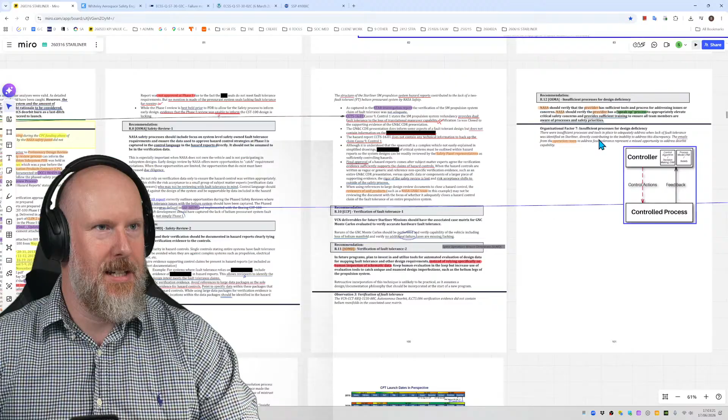But today we're going to continue from where we left off yesterday, and let's just bring that up on screen. There we go. So we got to yesterday the end of section 4.7.1, observations and recommendations, and we're going to continue with section 4.8 today. But before I do that, I'm going to mark off on the table of contents where we've actually got to. So we've done everything up until 4.7. I think that's where we got to, isn't it? Yes, it is. So we're now on section 4.8, common observations and organisational factors.

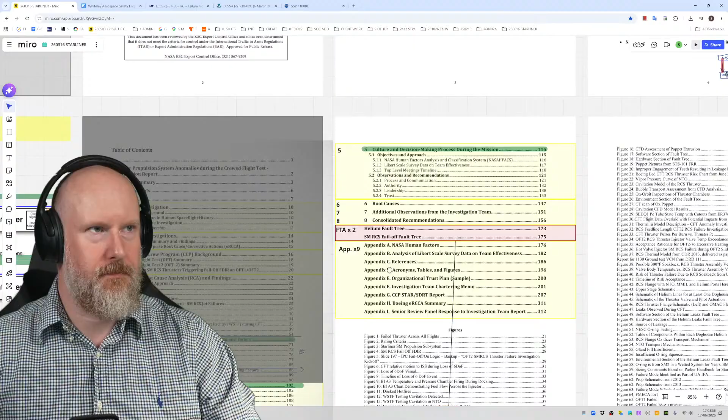That goes on to section 5, which is page 115. So there's about 13 pages there, and we should be able to get through that today, hopefully tonight. So about an hour, 90 minutes.

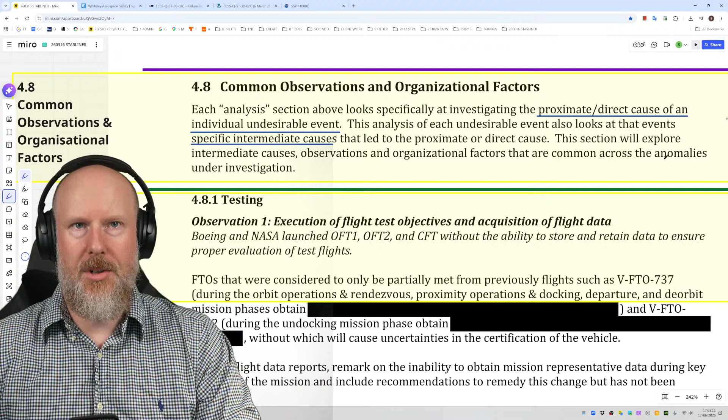So section 4.8 then. Common observations and organisational factors. So each analysis section above looks specifically at investigating the proximate direct cause of an individual undesirable event. This analysis of each undesirable event also looks at the event's specific intermediate causes that led to the proximate or direct cause. This section will explore intermediate causes, observations, and organisational factors that are common across the anomalies under investigation.

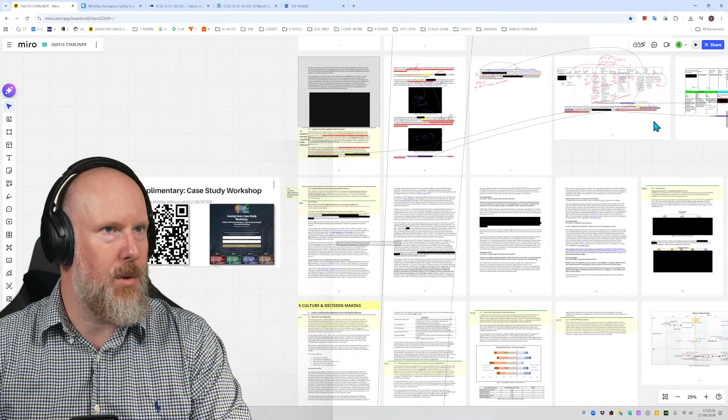Fantastic. So section 4.8.1 is about testing. There are some organisational factors. There are some recommendations. So what I'm going to do is steal my boxes and black lines from over there so I can better break the report up and understand and consume what's in it. So let's just do that quickly. Bring that all to the front. That's not what I wanted. That is what I wanted there, look. Excuse me.

There we go. Organisational factor 8. Recommendation, organisational factor 9, and then there's a recommendation, where is it? Just there, number 13. Nope. Recommendation 14, recommendation 15, recommendation 16. And then we'll keep going later on, depending on how far we go and how fast.

Okay, so testing. Observation number 1, execution of flight test objectives and acquisition of flight data. So if we get our little jigsaw puzzle piece that I keep talking about, it should be embedded in your brain by now, the number of hours I've been doing this and talking about it. So when we're talking about, yeah, there we go. So observation number 1, execution of flight test objectives and acquisition of flight data.

So if we just have a think about that statement through the lens of the control loop, the jigsaw piece, somebody or something is executing, so providing control actions, and they are essentially attempting to execute flight test objectives. So this controller, whoever that is, the flight test organization, they are making decisions about what objectives to put into the program, and then also which objectives to actually execute. And of course, they need some feedback about the flight test itself in the form of some data to ensure proper evaluation of those test flights.

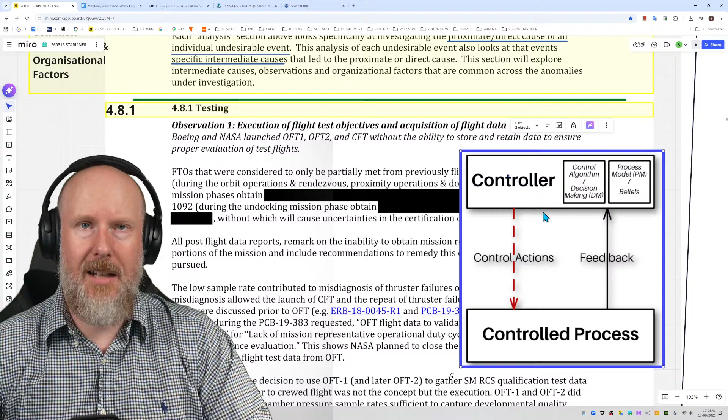So what sensors they have, what recording devices, how much data, at what rate and resolution, all of that good stuff. And that should hopefully provide the flight test organization adequate feedback to be able to assure that they've met flight test objectives. And of course, if they don't meet flight test objectives, what actually is the state of the situation? Because they need qualification data, they need test data, and of course they need to make sure they design that appropriately.

Now, in this case, it mentioned Boeing and NASA launched OFT-1. Is it operational flight test? Orbital flight test, that was it. Orbital flight test number 1, number 2, and the crewed flight test without the ability to store and retain data to ensure proper evaluation of test flights.

Which I'm sure you're already thinking, well, hang on a minute. Why would you spend all that time, treasure, blood, sweat, toil, and tears to do some launches if you're not actually going to store and retain the data to ensure proper evaluation of test flights? That seemed like a bit of a strange statement to make. So let's look into that. Let's understand what is going on. What does that statement actually mean? What's involved?

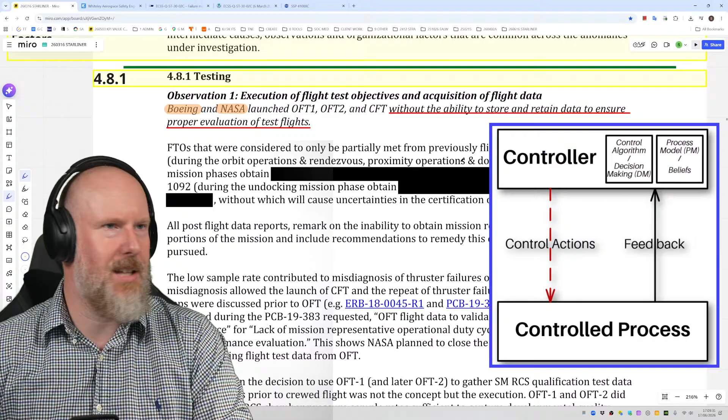Okay, so FTOs. What's an FTO? FTO is not a Japanese car from the early 90s. FTO, flight test objectives, I'm presuming. Yeah, there it is, look. Flight test objectives. Can you see that on the screen? Let me zoom in. There you go. Flight test objectives, FTOs.

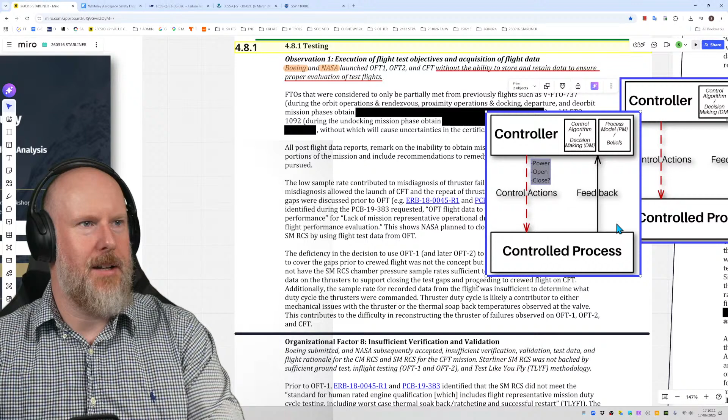So let's use our little grey boxes for text, because that was helpful before. There we go, that one. Let's put it over here, so I don't have to keep trying to remember over and over again. Right, there we go. So I'll delete that, paste it in there. Flight test objectives, stretch it out a bit. There we go, flight test objectives.

Flight test objectives that were considered to only be partially met from previous flights, such as VFTO 737, during the orbit and operations and rendezvous, proximity operations and docking departure and deorbit mission phases, obtain blankety blankety blank, and FTO 1092 during the undocking mission phase, obtain blankety blankety blank, without which will cause uncertainties in the certification of the vehicle.

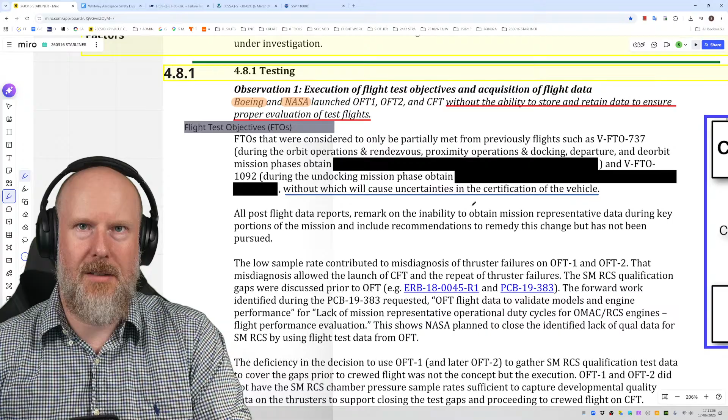So these two flight objectives are clearly really important to the program. That's the main objective here, is to be able to certify the vehicle. So without those two flight test objectives being achieved, then there's no point to the program. It's basically what we're all doing here. All post-flight data reports remark on the inability to obtain mission representative data during key portions of the mission and include recommendations to remedy this change, but has not been pursued.

Surely this would be on the main dashboard, the risk dashboard for the entire program. If you're not doing this, then what the heck is going on? I'm stating the obvious there, so let's keep going. The low sample rate contributed to misdiagnosis of thruster failures on OFT-1 and OFT-2.

So again, if this is the conduct of the flight test and the spacecraft operations, and this is our ground control, our project organization, they need adequate timely feedback about the spacecraft and its performance and behavior, so they could make safety critical decisions in a timely fashion. And if that data is not available to them, then the control structure is very, very inadequate in controlling those hazards and those risks.

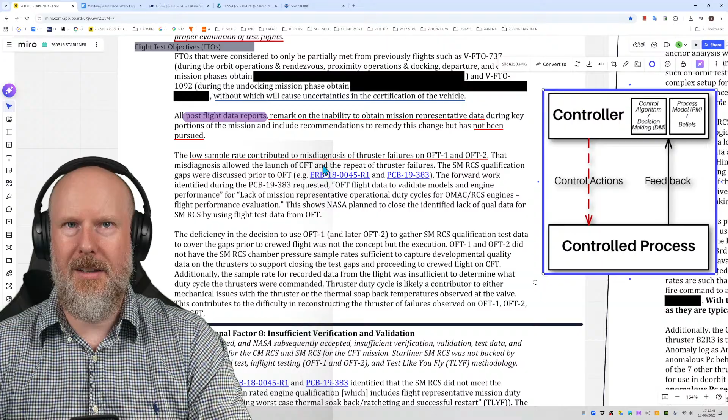So why was that? Why would it make sense to launch without the ability to obtain mission representative data and then not pursue it? And then, of course, why would it make sense to have a low sample rate that contributes to misdiagnosis of the thruster failures? What's going on? That misdiagnosis allowed the launch of CFT. So this is really bad. And the repeat of the thruster failures.

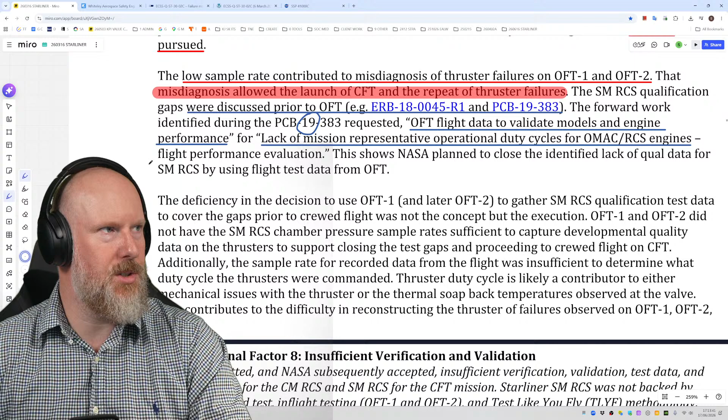The service module reaction control system qualification gaps were discussed prior to OFT. So they were discussed. Fantastic. The forward work identified during the PCB meeting 19383, so is that 2019? Presumably. Requested OFT flight data to validate models and engine performance for lack of mission representative operational duty cycles for OMAC RCS engines, flight performance evaluation. Yeah, that's kind of a basic requirement you'd expect to be fulfilled.

This shows NASA planned to close the identified lack of qual data by using flight data, test data from OFT. Well, yeah, okay, makes sense. The deficiency in the decision to use OFT-1 and later OFT-2 to gather service module reaction control system qualification test data to cover the gaps prior to crewed flight was not the concept, but the execution.

Sorry, the deficiency in the decision to use those to gather qualified test data to cover the gaps prior to crew was not the concept, but the execution. That doesn't make sense to me. I think it's either been a long day or I'm a bit slow today. Does that make sense to you, that sentence? The deficiency in the decision to use OFT-1 and OFT-2 to gather data to cover the gaps prior to crewed flight was not the concept, but the execution.

OFT-1 and OFT-2 did not have the RCS, okay. So those flights were not equipped to be able to do the sample rate sufficient to capture development quality data on the thrusters to support closing the test gaps and proceeding to crewed flight on CFT.

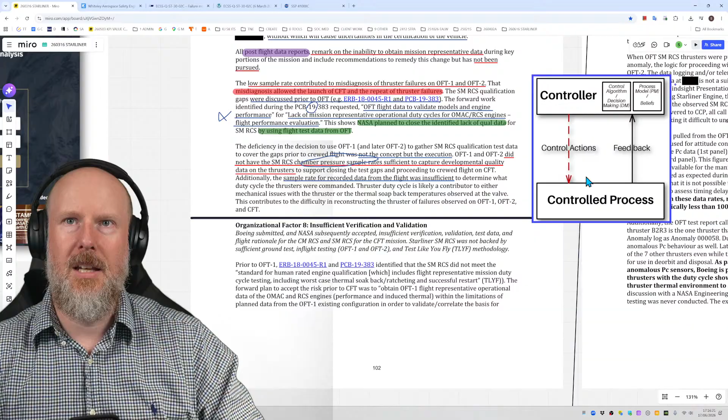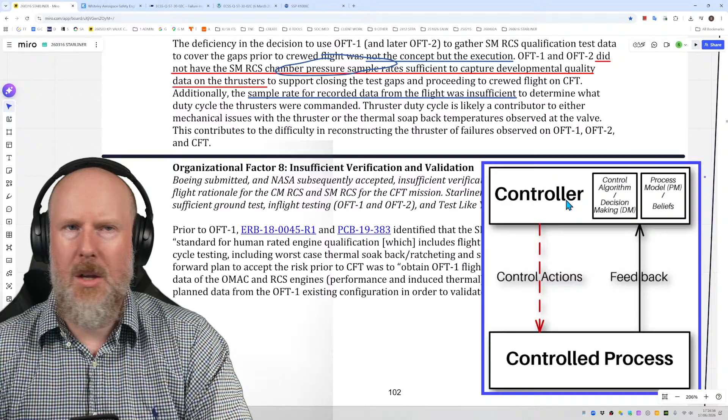So if this is our spacecraft control system, ground control, and this is the provision of the thrust and everything to do with control of thrust, and then this is the behavior of the spacecraft at the bottom, change in trajectory, all of that good stuff. If the feedback path for data is inadequate, not only is it potentially inadequate for the controller itself, but also for everyone else who needs that data. And that's clearly not acceptable in principle. So why was it accepted? Was it accepted knowingly? Let's have a look. Let's find out if we can.

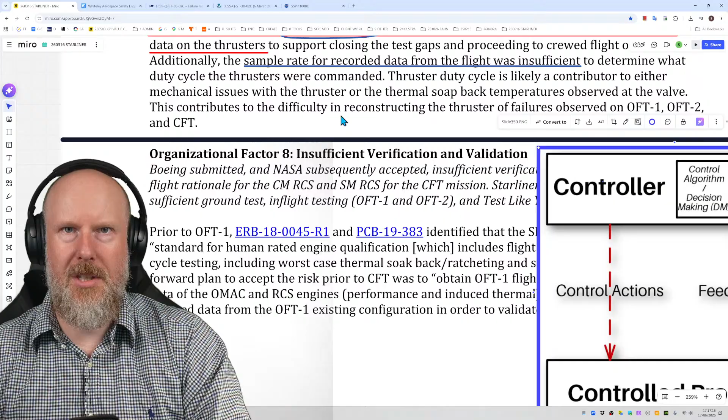Thruster duty cycle is likely a contributor to either mechanical issues with the thruster or the thermal soak-back temperatures observed at the valve. This contributes to the difficulty in reconstructing the thruster failures observed on OFT-1, 2 and crewed flight test. Okay, so that's observation 1, execution of flight test objectives and acquisition of flight data.

So I wasn't expecting that kind of observation. That's quite damning. That is quite damning. I can't imagine at the moment why it would make sense to continue with that. That seems quite strange. But let's keep going.

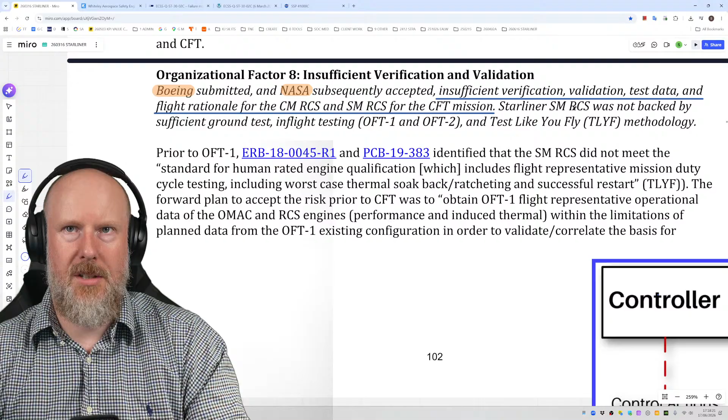Organizational factor number 8. Insufficient verification and validation. Boeing submitted and NASA subsequently accepted insufficient verification, validation test data and flight rationale for the crew module RCS and the service module RCS for the CFT mission. Starliner service module RCS was not backed by sufficient ground testing. Wow. Was not backed by sufficient ground testing, in-flight testing, and test-like-you-fly methodology. Excuse me, I think I'm coming down with something.

Prior to flight test number 1, ERB 18 and PCB 19 identified that the SM RCS did not meet the standard for human-rated engine qualification, which includes flight representative mission duty cycle testing, including worst-case thermal soak-back ratcheting and successful restart. So that is the test-like-you-fly methodology that's mentioned there. Okay, so they knew about it. The attendees and organizations involved in the ERB and the PCB knew that that was the case.

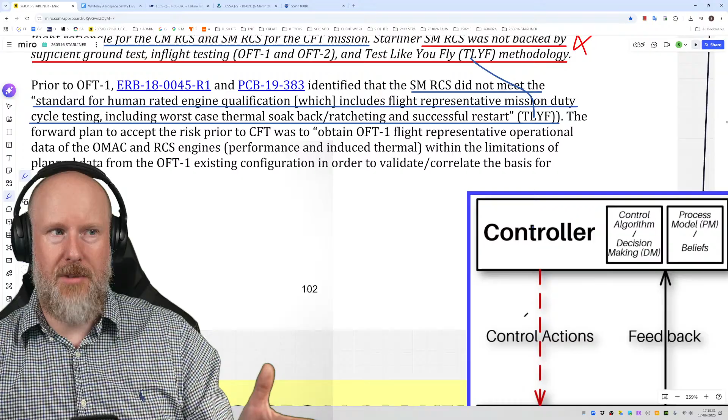Okay, so their mental model is, we know that there's a deficiency. So why would they give the authorization to continue? Did they give the authorization to continue to the rest of the program? These are the questions I'd expect the investigation to go and look at. And maybe we'll find out in the next few pages. The forward plan to accept the risk prior to the CFT. So, forward plan. There we go, everyone. Forward action plan. Yay, FAPs.

Forward plan to accept the risk prior to CFT was to obtain OFT-1 flight representative operational data of the OMAC and RCS engines, performance and induced thermal within the limitations of the planned data from the OFT-1 existing configuration in order to correlate the basis for acceptable engine performance under nominal mission conditions. Once OMAC RCS engine performance and thermal conditions are validated for actual flight conditions, environments, operations, representative usage conditions in OFT-1, residual risk for crewed flight application will be mitigated and the issue can be closed.

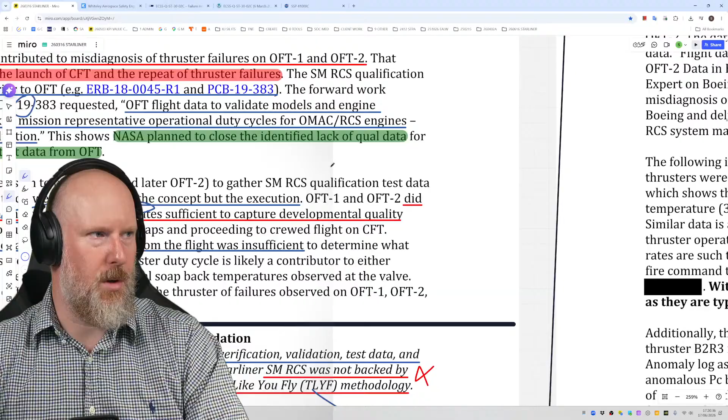Okay, but that sounds like that didn't happen. That's what they intended, but that's not what happened. So this is, where is it? So accept the risk prior to CFT, but it's to obtain flight representative operational data within the limitations of the plan data from OFT-1.

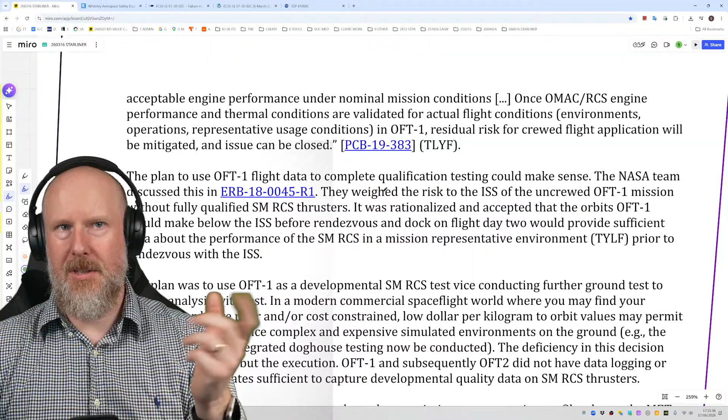So there may have been a delta between what they need to make it flight representative versus what the spacecraft is outfitted with, flight test instrumentation or whatever, to be able to achieve that. So I imagine there'll have been hopefully a consideration of that if there's a delta, and then an explanation as to why that's okay. And maybe the justification would be, well, we can do this on OFT-1, that gives us a warm feeling, and then the gaps, the delta, we can then fill in with OFT-2, presumably. I'm just anticipating they're the kind of things that are going to come out.

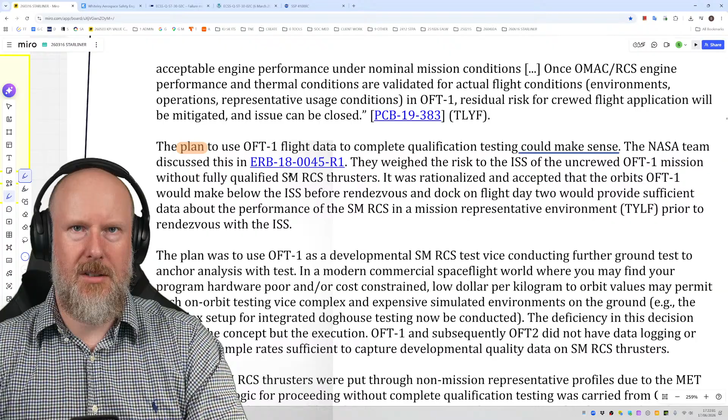Let's keep going. So the plan to use OFT-1 flight data to complete qualification testing could make sense. The NASA team discussed this in ERB 180045, which is that one, same one. They weighed the risk to the ISS of the uncrewed OFT-1 mission. Oh, this is not sounding too good. They weighed the risk to the ISS of the uncrewed OFT-1 mission without fully qualified SM RCS thrusters.

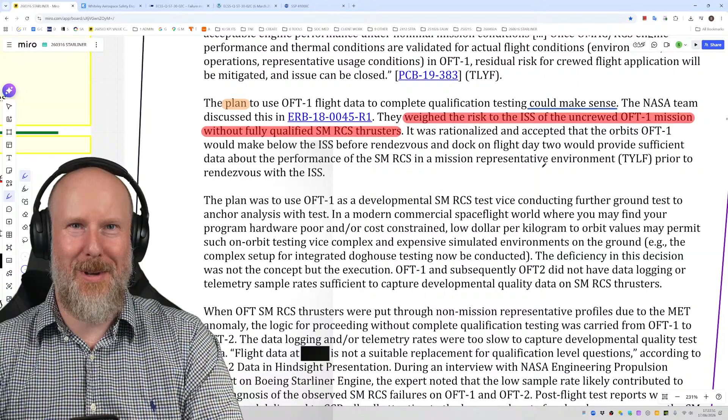It was rationalised and accepted that the orbits of OFT-1 made below the ISS before rendezvous and dock on flight day 2 would provide sufficient data about the performance of the SM RCS in a representative environment prior to rendezvous with the ISS. I'm not being funny, but that sounds super risky. That sounds really, really risky. I'm actually gobsmacked by that. Because you've essentially got a test vehicle that's not qualified operating right next to a really, really valuable asset that has human beings on board. The magnitude of severity of smashing into the space station with an unqualified test vehicle. Wow.

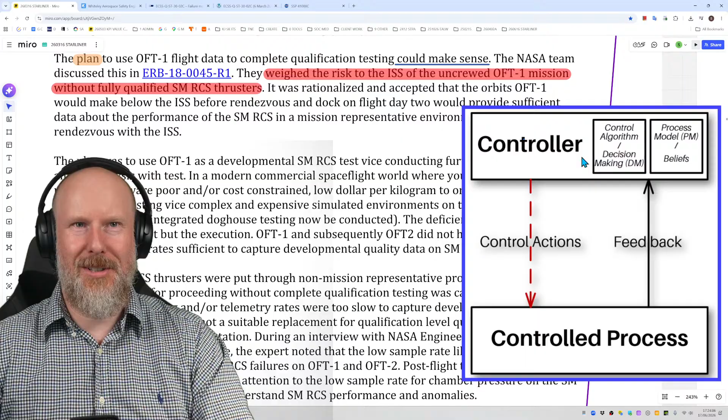Let's get our little jigsaw piece up here for a minute. So let's have a think. If this is the Starliner program management making decisions about how they're going to do the flight test program, and they're weighing the risk to the ISS of an uncrewed OFT-1 mission without fully qualified SM RCS thrusters, I'd like to think that whatever that organisation is has got stakeholders from the ISS team who are responsible for operational safety. And those stakeholders would be like, nah, mate, you're not bringing that thing near our space station. Not this time. Maybe next time when we've got assurance that you've actually done a good job. But no, that's not coming near our space station again.

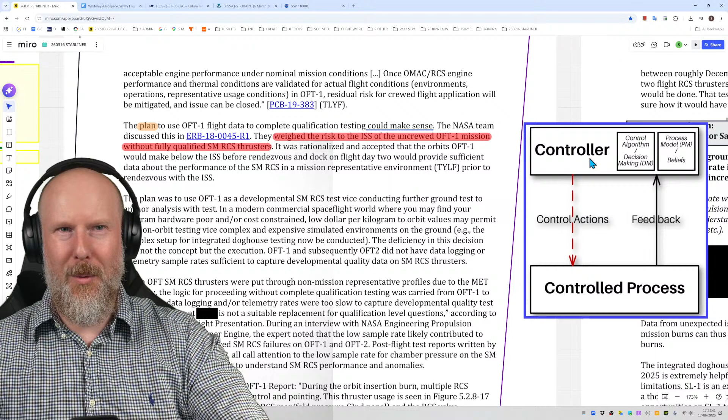And with the benefit of hindsight, they've had 3 flight tests. One of those is a crew flight test. I'm surprised the ISS safety management team are not like, no, stay away. Go and do your flight test away from our infinitely valuable space station, and then show us some good test evidence, and when we're happy, then we'll allow you to come to our space station. But that's just me. I'm very cynical in this respect, because what we've discovered so far does not give me a warm feeling with regards to the system safety engineering of the design of that spacecraft.

So if the ISS safety management team are watching this, I'd love to be a fly on the wall in some of your meetings and understand how you can justify this, and whether you have had people screaming and shouting and saying no. I don't know.

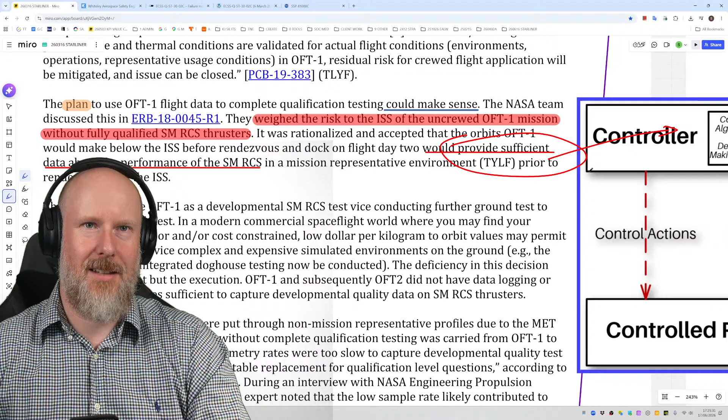Anyway, let's keep going. So it was rationalised and accepted that the orbits made below the ISS before rendezvous and dock on flight day 2 would provide sufficient data about the performance of the SM RCS. So when we say sufficient data, is this to the test organisation, or is this to justify the safety case to the ISS responsible organisation? Because the burden of proof and sufficiency might be different depending on which stakeholder we're talking about, if that makes sense.

Right, so let's keep going. I think I've laboured that point enough, haven't I? Yeah, there we go. So the plan was to use OFT-1 as a developmental SM RCS test, vice conducting further ground test to anchor analysis with the test.

I mean, from a program perspective, why would it make sense to waste a flight test when you could conduct further ground tests and solve these problems? When I imagine that we should already be doing the ground test anyway to qualify this stuff. Why do we have to wait until we've got a crewed flight test before we get ground tests sorted out? That's the impression I've got from the previous parts of the report. Anyway, let's keep going. To anchor analysis with test.

In a modern commercial spaceflight world where you may find your program hardware poor and or cost constrained, low dollar per kilogram to orbit values may permit such on-orbit testing vice complex and expensive simulated environments on the ground. So it's cheap to stick them in space, so we'll just do that. Yeah, we'll do that, everyone. It's cheap to stick them in space, but we're going to put it right next to an invaluable International Space Station that's got people on it.

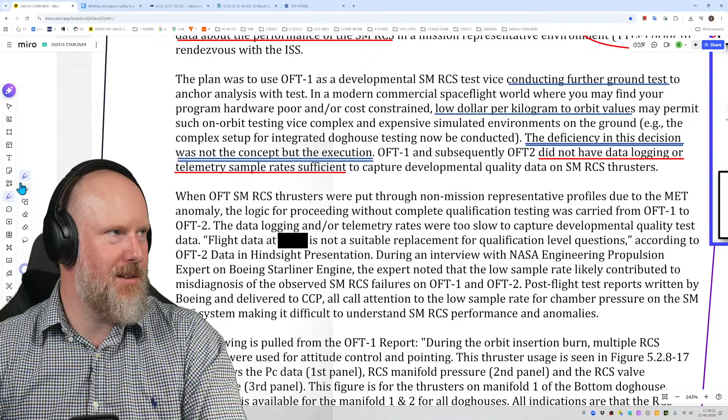Okay, OFT-1 and subsequently OFT-2 did not have data logging, so they couldn't even do what they said they were going to do anyway. Sampling rates sufficient to capture developmental quality data on the SM RCS thrusters. So why was that? Who made that decision? Why did they make the decision? Why did it make sense to make the decision like that?

I mean, some of these decisions sound like someone must have had a gun put to their head to say you need to keep going, because it doesn't make logical sense as an outsider. But then again, as we keep going through this, we might get to a point where actually it's like, yeah, that kind of makes sense that they would make a decision like that, regardless of how ridiculous it appears on the outset. When you actually understand the context, it might be like, well, yeah, I would make the same decision maybe. I don't know.

Anyway, when OFT, orbital flight test, service module RCS thrusters were put through non-mission representative profiles due to the mission elapsed time anomaly. I think I'm going to have to look at that mission elapsed time. Should we risk having a go on Google, everybody? Should we risk it? Mission elapsed time anomaly, Starliner. I can't spell anomaly, everybody. There we go. So Boeing orbital flight test. Right, let's just search for MET.

Anomalies. A software logic issue with the spacecraft's mission elapsed time clock manifested 31 minutes into the flight. Due to intermittent space-ground communication issues, flight controllers could not correct the issue. This anomaly caused the spacecraft's orbital maneuvering thrusters to burn into an incorrect orbit, causing too much propellant to be burned. What? This precluded a rendezvous and docking with the... oh my gosh. This mission was reduced to just 3 days, with the spacecraft successfully landing at White Sands Space Harbor on December 22nd, 2019.

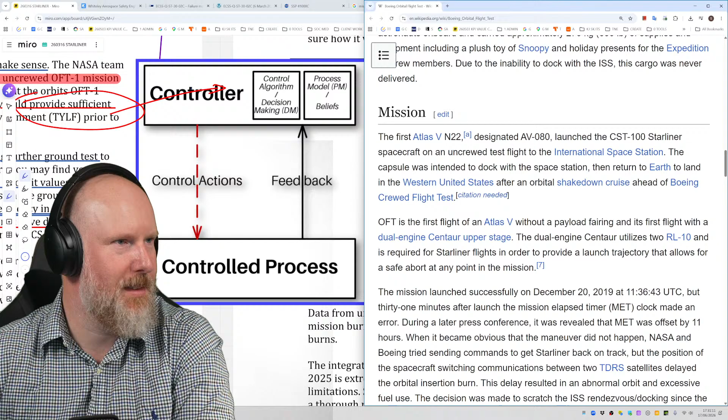Wow. I mean, just to put a fine point on things, right? Let's get our little jigsaw piece out, everybody. Let's put it on there so you can see it. Okay, so where is it? Anomalies. Okay, so a software logic issue with the spacecraft's mission elapsed time clock.

Right, so I don't know the architecture or design of this spacecraft, and I know some generic architecture stuff to do with other things I've looked at in the past. So there will be a computer on board, or multiple computers, and they will each have their own interpretation of what time is, and they're supposed to synchronize that time amongst themselves, especially during critical operations, assuming that the architecture is similar to how other things I've seen in the past. And so that mission elapsed time clock, if they're talking about a specific clock, it will be inside a specific computer performing a specific function, roles and responsibilities.

Now, if this is talking about the orbital maneuvering thrusters to burn into an incorrect orbit, the controller is essentially the thrust controller of some description, the thrust control computer, whatever it is. And that computer will have some control algorithms, decision making, a process model or beliefs. And as part of one of those beliefs, it will be about mission elapsed time. And that time will be used to synchronize the decisions that that controller makes about thrust and the control actions it provides. Going back to duration, timing, sequence, all of that other good stuff.

Now, of course, if they are burning into an incorrect orbit and they've used too much propellant, then obviously there's some unsafe control actions there, some contributory control actions. So why would it make sense for that controller to do that? And what they're saying here is that's due to anomalies with the mission elapsed time. And I've not read the details, so I don't know the background, but they've said there's some anomalies with it. We don't know what those specific anomalies are. But if you're affecting the beliefs of the controller and it starts doing strange things, we can't be surprised.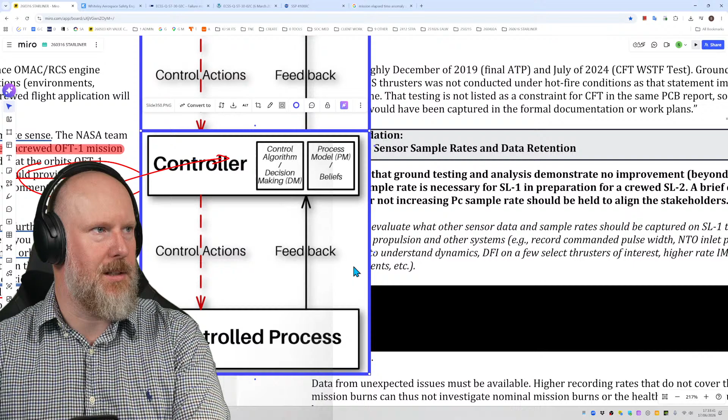And so, given that we know that, just this 30 seconds looking at a control loop, we can start putting integrity requirements on the mission elapsed time source, what that time is and how it's used, and then how it's physically implemented. And then, of course, it mentions here about intermittent space-ground communication issues. So let's have another one of these little control loops that can represent the ground. So let's put that to the back. Oh, no, not quite to the back. There we go. So if we have two of these, because this is the ground control team, this is the onboard computer that's controlling the spacecraft and doing the thrust control actions.

If they have a breakage in this ability to provide control actions and receive feedback from the spacecraft due to intermittent space-to-ground communication issues, I'd argue and assume that the design of the spacecraft had already identified intermittent communications as being an issue, so they will have put certain features in the design and architecture of the onboard computer to be able to enact certain actions when not in control or communication with Earth. And now I don't know whether that's the case in this design. I'm assuming that it is, because intermittent issues with space-ground comms shouldn't really affect the safe control of the spacecraft, especially if we're talking about a spacecraft that's going to dock with the International Space Station. So yeah, that's a bit strange.

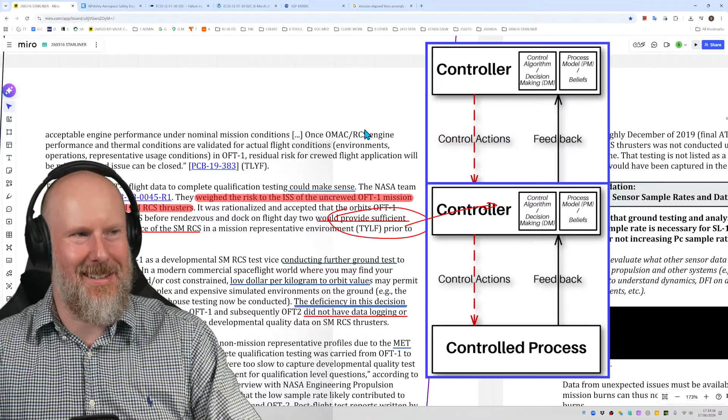And then to find another software anomaly as well, I mean, there's something not right with the way this has been designed and the way it's been engineered and certified and tested. It really needs a good looking at, I would strongly suggest. And I'd recommend, of course, using STAMP, STPA or CAST.

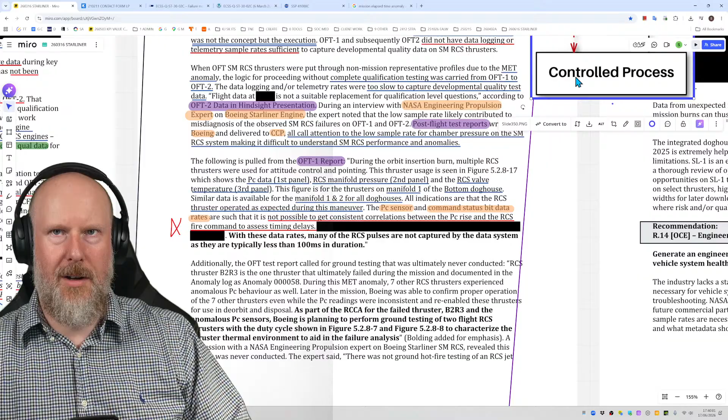Okay, now that is critical. That is really important. It's like going back to our little jigsaw puzzle piece earlier on. Let's just pull that apart for a minute. So when we're talking about chamber pressure, we're talking about this feedback here, but we're also talking about command status bit data. So there's two of those in fact, let me save myself a bit of time and just stick it in here like this.

So we have chamber pressure, PC. It's combustion chamber pressure, isn't it? Combustion chamber pressure. And we have the command status bit data. And then of course there's the data rates of that feedback. But that feedback is twofold. One is to establish chamber pressure, which is the controlled process, but also to understand the command status. You know, what commands has the controller.

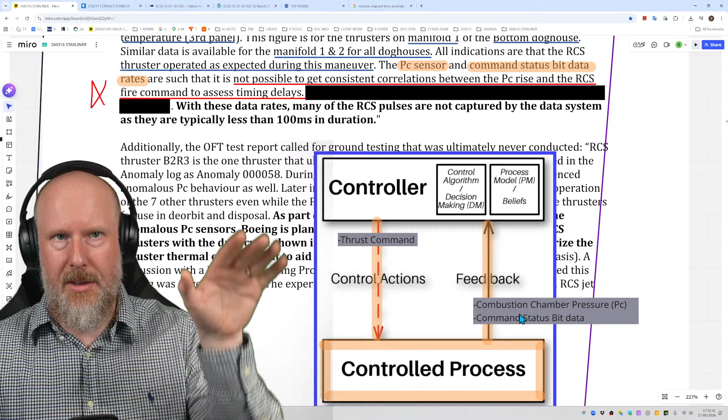There we go, thrust command. So what commands has this controller been providing? And then by extension, how has the controlled process responded to that? And if you don't have that at sufficient rates, you're not going to be able to understand the behavior and whether it's acceptable or not. And this goes back to these simple diagrams here.

If you imagine that, I don't want to get too technical, but let's say this 0 is thrust off, 1 is thrust on. I'm not going to say whether it's variable or not, but if you imagine this is the perfect scenario, as soon as you provide the command thrust on, it immediately achieves the thrust level that you want.

The physics of the situation are it's likely not a curved line, I need a straight line. There we go. Oh, why is it curved? I want a straight line. Oh my gosh, give me straight. There we go, straight line, everybody. Let's give it a colour. What colour should we have? Let's have a pink colour for a change. That'll do. Right. So imagine that there's a ramp.

So this time, whatever this is, in tens of seconds, milliseconds, minutes, whatever it is, there'll be a time that it ramps. So if it ramps up as quick as that, that's high, fast response. But if it takes ages and ages, of course, the measurement sample rate that you've got needs to be adequate enough to be able to detect that slant, that variance. And of course, you've also got it on the way down as well.

So if you turn it off at this point here, does the thrust actually stop quickly as you expect, or does it take ages? Is there a delay, a ramp down? Because of course, the more that this is exaggerated like this, the more potential that you're going to have for undesired effects and potential unsafe contributory control actions.

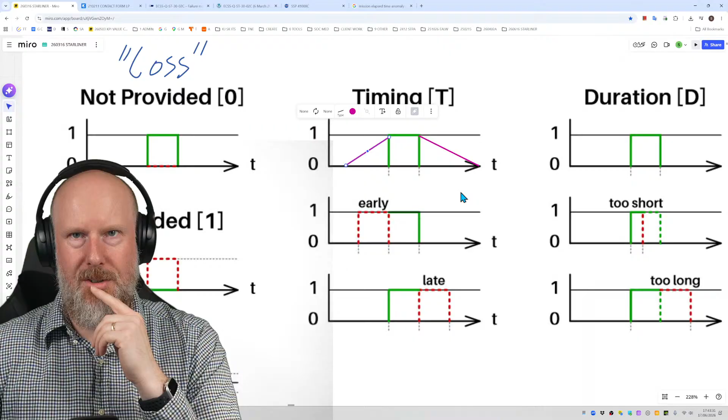And again, that could be just the timing of the command that is provided. But then you've also got the potential for the duration as well. So if the duration is too long or too short, if it's too long, that talks about potentially wasting fuel and things like that. I hope that makes sense.

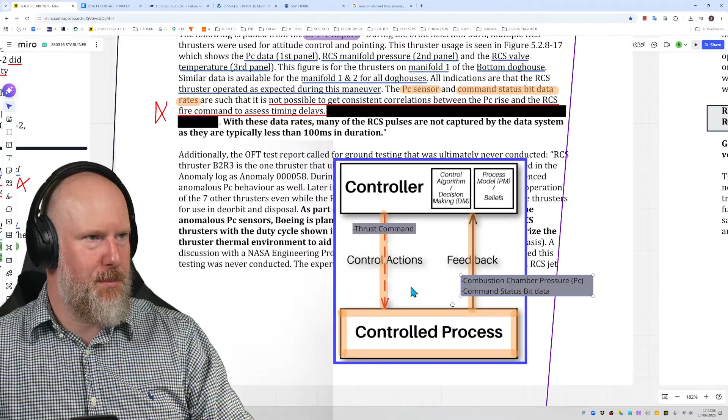Just bear with me while I get back to where we were. There we go. So let's just put this to one side. That'll do, won't it? Excuse me. Right. Get rid of that. Delete that bit. There we go. There's another jigsaw piece.

Right. So with these data rates, many of the RCS pulses are not captured by the data system as they are typically less than 100 milliseconds in duration. That's the duration there. So if we know this at the outset, we should be specifying the design of the data capture system to be able to deal with that. So the question is, why was it not designed that way? Did they know that this was the issue and they just went with it? Why is the data capture rate not adequate?

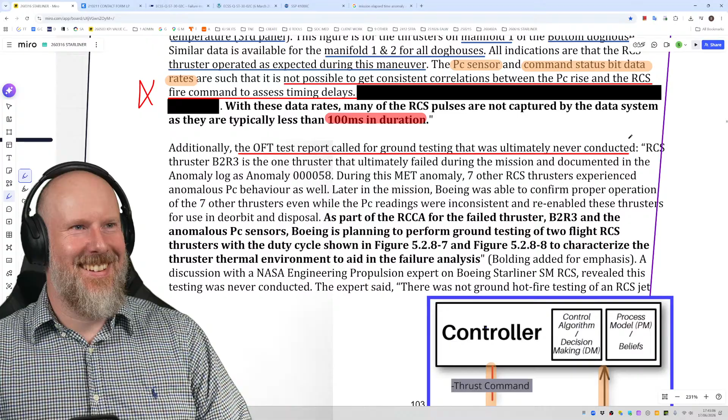What's going on there? Okay, additionally, the OFT test report called for ground testing that was ultimately never conducted. So there's a request, going back to our little jigsaw puzzle. Somebody in the test organisation sent some feedback to program leadership and said, hey, we need to do some ground testing for this.

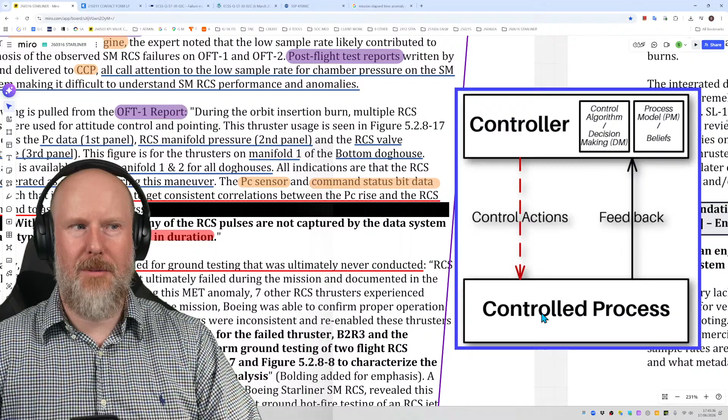Please, request, action. Is it a control action or is it feedback? Is it a demand? Is it a request? What is this interaction from the test team, or whoever wrote the test report, and the leadership, the entity who is responsible for taking that on and then doing something with it? So did they do that? Did they receive it? Did they anticipate it? Did they make an active decision not to do that for whatever reason? That's what the investigation should be looking at.

Okay, so RCS thruster B2R3 is the one thruster that ultimately failed during the mission and was documented in the anomaly log. Yay, anomaly logs. Everyone loves a log. Anomaly 000058. Does that mean there were 57 other ones that we need to think about?

During this MET anomaly, seven other RCS thrusters experienced anomalous PC behavior as well. Later in the mission, hang on, so many anomalies, everybody. Anomaly 7, anomalous PC behavior. Excuse me, right. Later in the mission, Boeing was able to confirm proper... I've chosen, yeah, let me make that purple as well while I'm at it.

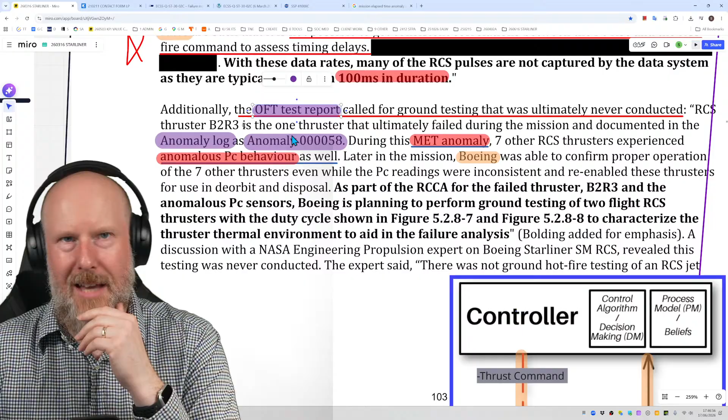I know this seems like a bit of an enthusiastic thing to do, put all these highlights and things on, but the reason I do this is because it helps me to practice developing my muscles in my brain, my control algorithms, my decision making, on trying to review information and critically think about it through the lens of this control loop. So is the content of this report capturing some feedback that needs to go somewhere else, or maybe it's some assumptions that need to be tracked, it's got some actions in it, maybe it's got some safety critical information that has to be communicated.

So the entity itself, do I want to treat it as a type of controller notionally, or do I want to treat it as a vessel for important information? And then what is the information? What context is it? Is it important? Does it influence decisions? Maybe it updates some assumptions? So the reason I'm doing this is just so I can practice, lift some weights with my brain, do the reps to build those muscles and that mental agility.

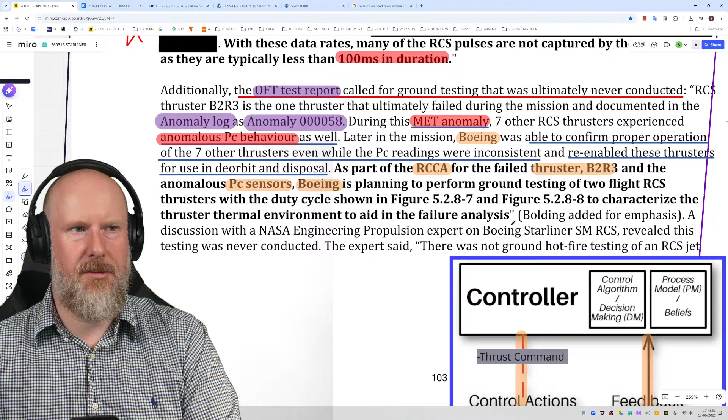Anyway, later in the mission, Boeing was able to confirm proper operation of the 7 thrusters, even while the PC readings were inconsistent, and re-enabled these thrusters for use in deorbit and disposal. As part of the root cause analysis and corrective action activity for the failed thruster B2R3 and the anomalous PC sensors, so these are PC sensors and thrusters, so actuators and sensors, Boeing is planning to perform ground testing of 2 flight RCS thrusters with the duty cycle shown in figure 5.2.8, to characterize the thruster thermal environment to aid in the failure analysis. Bolding added for emphasis.

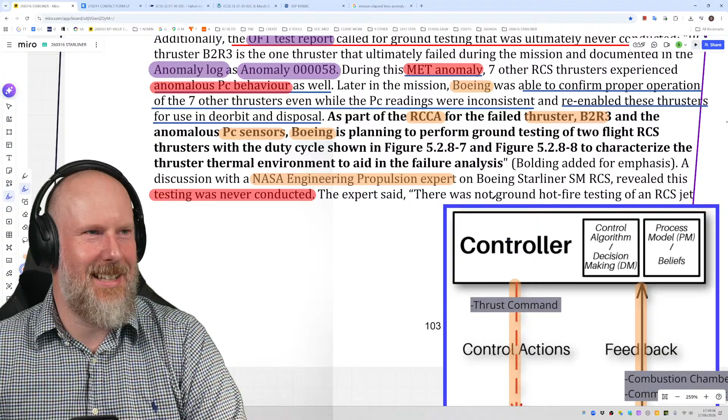Oh, right, okay, so for the RCCA that's reported in this report that is ongoing, Boeing is planning to perform ground testing. So they may have already done that. There might be people watching this that are involved in that activity and know everything about it, so fantastic. It's a bit late, but it's great that it's planned to be done. A discussion with NASA engineering propulsion expert on Boeing Starliner SM RCS revealed this test was never conducted. The expert said there was not ground hot fire testing of an RCS jet.

Right, shall I put that out of the way? I'll just put it out of the way, it'll be fine. I'll put it back in a minute, I promise. There we go.

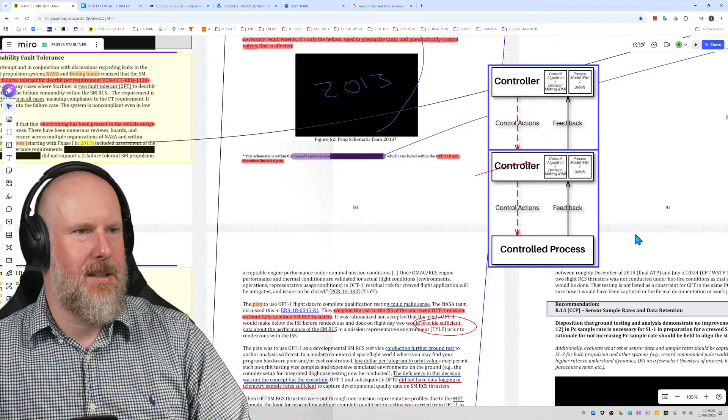So there was not ground hot fire testing of an RCS jet between roughly December 2019, final ATP, acceptance test procedure, is it? ATP. Acceptance test procedure. There you go. That was a good memory, Simon. Well done. And July 2024. So that was the best part of 5 years. Ground testing of 2 flight thrusters was not conducted under hot fire conditions, as the statement implies will be done. That testing is not listed as a constraint for the CFT in the same PCB report. So I'm not sure how it would have been captured in the formal documentation or work plans.

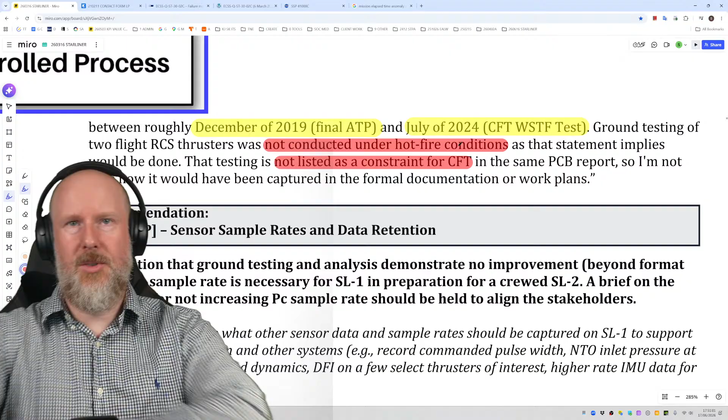Wow, so is that finger trouble? Is that someone having problems with Microsoft Outlook, Microsoft Office, PowerPoint, not capturing things? I imagine at the time this was done, they won't have been mandated to use silly things like Microsoft Copilot and all that AI nonsense. Hopefully not. But in a few years' time, I'm pretty sure that kind of AI nonsense will be contributors to accident investigation reports.

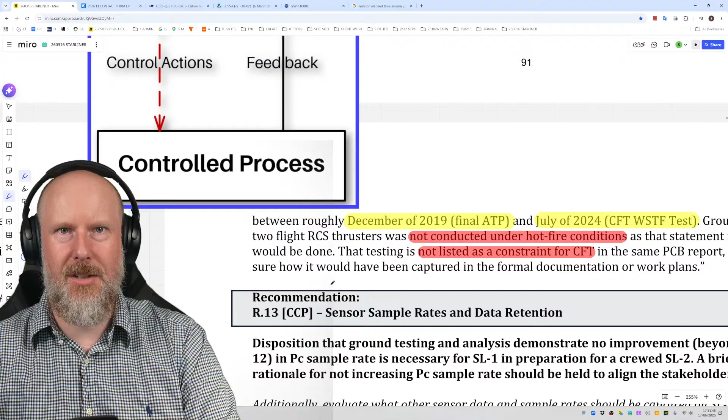Let's have a look. So I'm not sure how it would have been captured in the formal documentation or work plan. So recommendation 13. Commercial Crew Program, sensor sample rates, and data retention. So that recommendation directly relates to the feedback path from the controlled process, the spacecraft mission, the test vehicle, and the ground test organization, flight test organization. Disposition: ground testing and analysis demonstrate no improvement beyond format 12 in combustion chamber pressure sample rate is necessary for SL1 in preparation for crewed SL2.

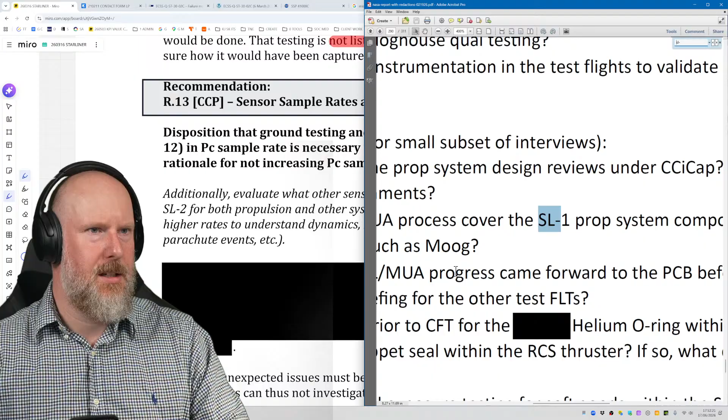I can't remember what SL means. What's SL dash mean, everybody? Come on, that must be explained somewhere, surely. No, it's not. So I'm presuming it's future flights in the program.

Right. No improvement in the sample rate is necessary for SL1 in preparation for crewed SL2. A brief on the rationale for not increasing sample rate should be held to align stakeholders. Additionally, evaluate what sensor data and sample rate should be captured on SL1 to support SL2 for both propulsion and other systems, e.g. record commanded pulse width, NTO, nitrogen tetroxide inlet pressure at higher rates to understand dynamics, DFI on few select thrusters of interest, higher rate IMU data for parachute events.

So IMU's inertial measurement unit, DFI, don't know what that is. Let's have a look. DFI, is it in the acronym list? No, it's not. Fantastic. Just what we wanted. DFI, right, if I put a bracket around the front of it, maybe I can trick it to tell me what it means. No, it's not specified. Absolutely fantastic. I love it when that happens.

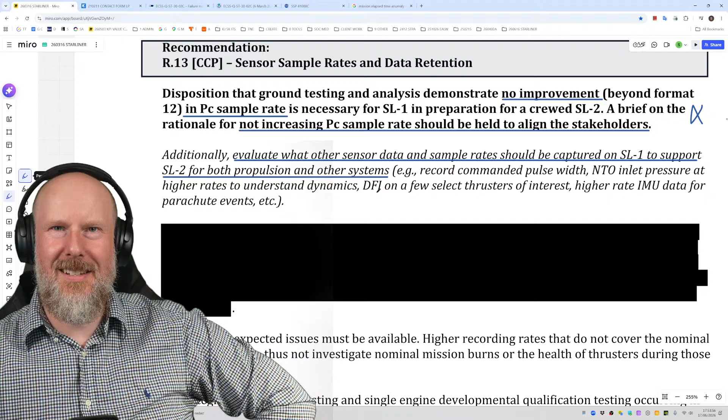DFI, is it flight instrumentation, maybe, on few select thrusters of interest? I don't know. Blankety blank.

Yeah, this recommendation seems to imply that they don't want to change the sample rate or the way it's collected. So there's a rationale for not increasing it. But is that right? Based on what I've been saying today, do you think that rationale would still hold up, whatever it is? Because my confidence in the engineering and design of this is a lot lower than it was when I started this session today. It was really high at the beginning, and it's just got progressively less and less the more I learn. No disrespect to anybody, but it's not giving me a warm feeling.

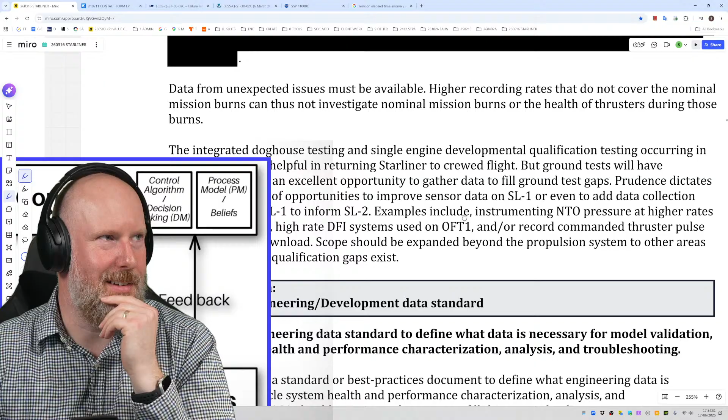Okay, let's keep going. So, data from unexpected issues must be available. Higher recording rates that do not cover the nominal mission burns can thus not investigate nominal mission burns or the health of thrusters during those burns. Fantastic. I'm really pleased you've said that. The integrated doghouse testing and single engine development qualification testing occurring in 2025 is extremely helpful in returning Starliner to crewed flight, but ground tests will have limitations. SL1 is an excellent opportunity to gather data to fill ground test gaps.

Prudence dictates a thorough review of the opportunities to improve sensor data on SL1 or even to add data collection opportunities on SL1 to inform SL2. Examples include instrumenting NTO pressure at high rates on select thrusters, high rate on DFI systems used on OFT1, and or record commanded thruster pulse width for later download. I think this is all, if you think about it through the lens of a control loop, from the basic fundamentals, how do you know that this controller and the control path and the control process is behaving properly?

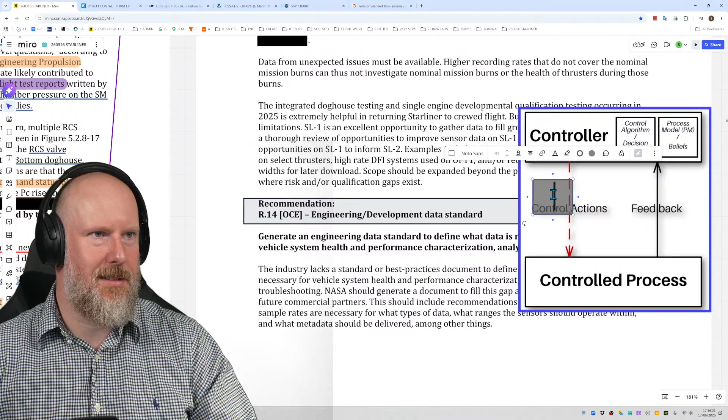You need some kind of sensors. Let's get a little box. There we go. Let's call this a sensor. In fact, no. Let's do an S. There we go. Like that. That'll do, won't it? Let's give it a nice orange color with a nice orange border. There we go. Let's make it a bit smaller because that's too big. There we go.

Fantastic. So if you want to understand how this control loop is working, you need sensors that are related to the controller. So whether it's too hot, too cold, whether it's got the right electrical power, whether it's been exposed to radiation, all that other good stuff. You probably want to know something about the control algorithm and the decisions that it's making. You're probably going to want to know about what beliefs it has, because if it believes that the sensory data it's getting is adequate and it's providing unsafe control actions, we need to know that. We need to know what feedback it's receiving. We need to know what interactions are happening.

Are there any other controllers that are providing information or data, maybe from the ground? Are there any inputs from the ground that we also need to detect? So we put a sensor up there. What inputs does the controller have? And then, of course, what are the outputs from the controller? What control actions is it actually trying to command? And then we need some kind of feedback about how those control actions are actually manifested. So if you provide a control action, if you say, what example can I give? Stop watching that YouTube video.

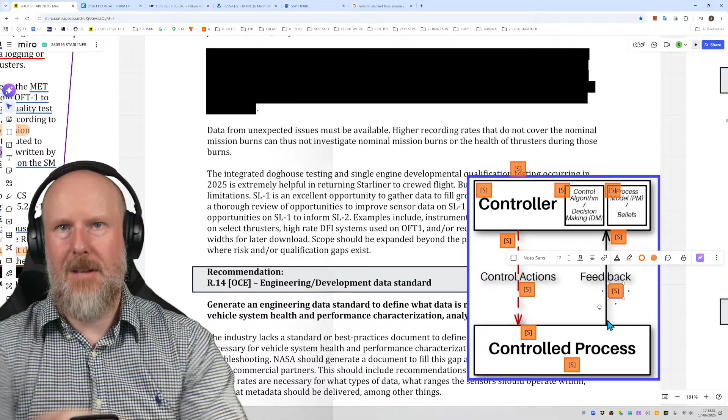Maybe there's something going on in this control path that's leading the control process to behave as though it has received an unsafe control action, and so it's doing what it's doing, but actually the controller's not guilty. And then, of course, what is it about the control process itself we need to measure? So this was talking about the combustion chamber pressure, for example. And then, of course, what sensors do we have in that feedback path? Are there enough sensors of the right types providing feedback to the controller so that the controller can actually control

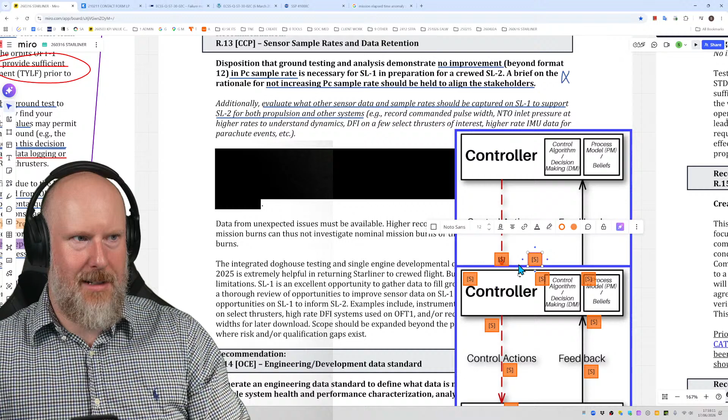its process appropriately? And then if you want to go really far, let's talk about the flight test organization, the ground team themselves. So, what feedback do they need? Do they need to know that they're able to receive feedback from the spacecraft? Is it at the right sample rate? Is it being received in the control center at the right time? Do they have that information available to them to make decisions? What decisions are they making based on that information?

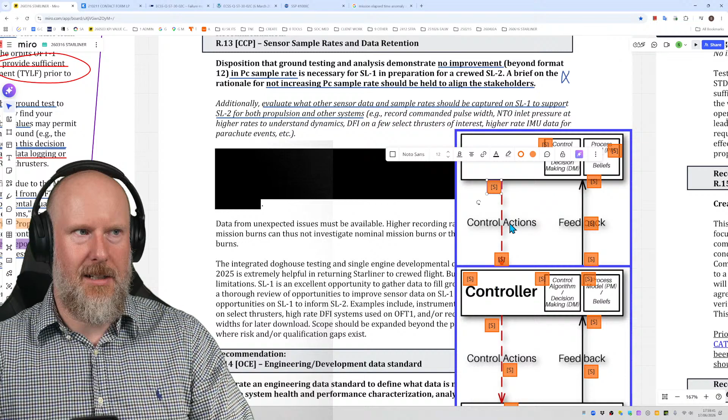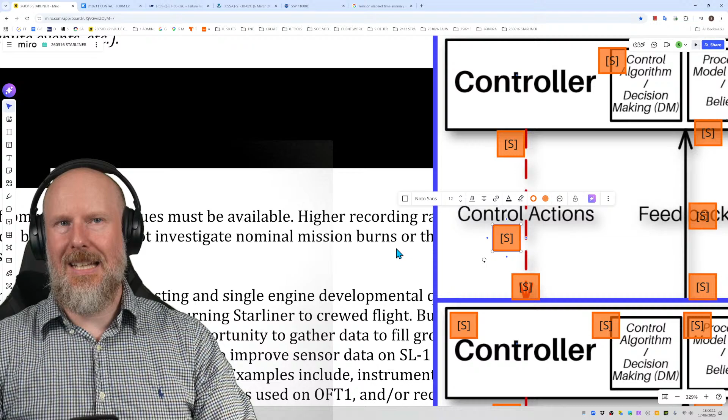We've already said that for OFT1 and OFT2, they didn't have adequate feedback, so they were making potentially dangerous decisions for the crewed flight test. And of course, what control actions are they providing? And how are those control actions provided to, in this case, the spacecraft? And it's not a big leap to think, well, hang on, if this is the engineering organization and this is the system safety engineers and the systems engineers making decisions about the architecture of the design of the system, then how are they communicating? What method are they using? Are they using a PowerPoint slide that doesn't contain the right amount of the correct information? Maybe the information was deleted or overlooked because Microsoft Office often crashes without saving your work.

So I'm hoping you can see that this systematic examination of, well, what is the control loop? Who are we as the stakeholder in relation to this? What are our needs for sensory feedback? You're potentially specifying a lot of sensors there to be able to understand the safe behavior of these loops. And if you are under-specifying the number and types of sensors and the sensor data rate, the collection data rate and how it's communicated and whether it's recorded, whether it's crash survivable, all of that other good stuff, this can help you make those decisions.

Okay, so now we've said all of that. Let's put this out of the way so it's not there. Let's put it down there a bit. There. That'll do, won't it? There we go. That'll do. Right.

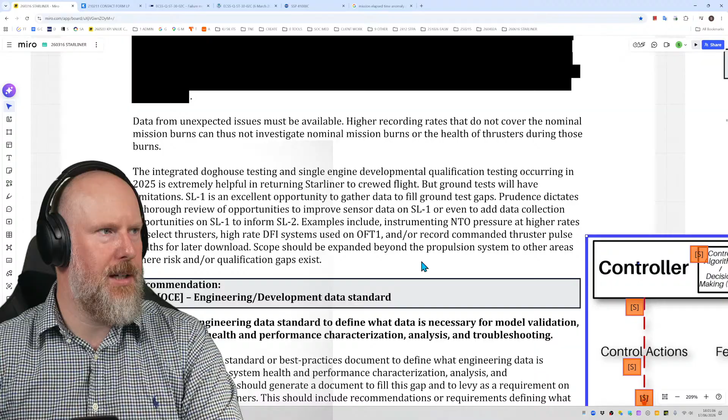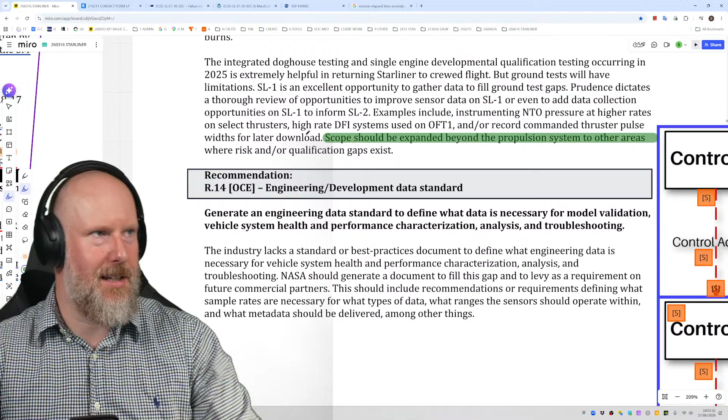Where were we? So yeah, and/or record commanded thruster pulse widths for later download. Scope should be expanded beyond the propulsion system to other areas where risk and/or qualification gaps exist. Yes, I absolutely 100% agree with that. I think that's a fantastic recommendation because that's essentially what I've just said. I agree, that's fantastic. There we go.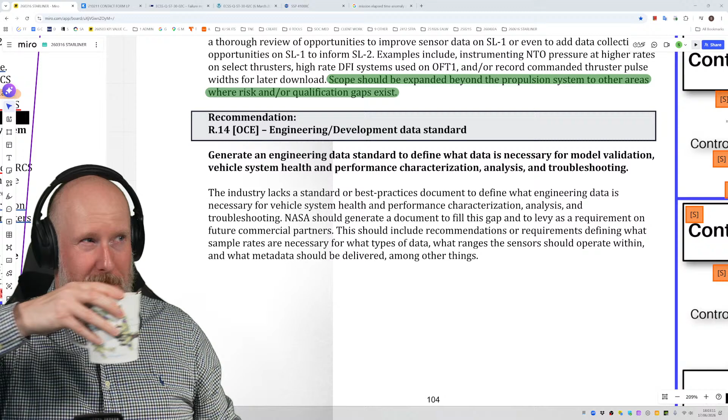So OCE, Engineering Development Data Standard. Generate an engineering data standard to define what data is necessary for model validation, vehicle system health, and performance characterization, analysis, and troubleshooting.

I'm a little bit surprised by that because I kind of would have expected that would be part of standard practice for this kind of engineering organisation. So I'm a bit surprised. I'm not shocked, but I'm a bit surprised. But again, this is a standard.

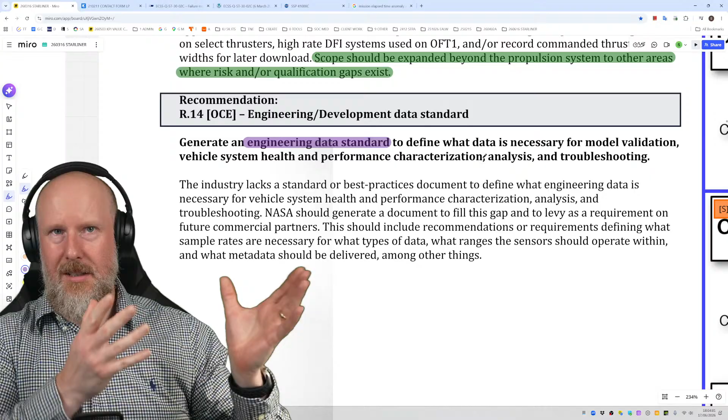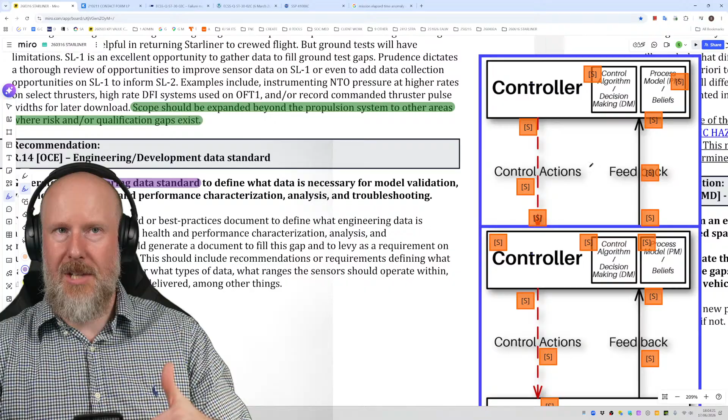You know, if we were thinking about it through the lens of a control structure and the beliefs and mental models of all the people involved, it'd be kind of good to have a standard about what engineering development data they need as part of the project, the program, and that is centralized so everybody knows and understands and it can be coordinated. It's like a central model that everyone can refer to and has access to so they can see it directly, not through some kind of remote third party software database

that everyone has to log in and faff around with. Excuse me, I'm not naming names, particular software tools, but they seem to make engineering a lot harder than it needs to be, especially when it keeps logging out.

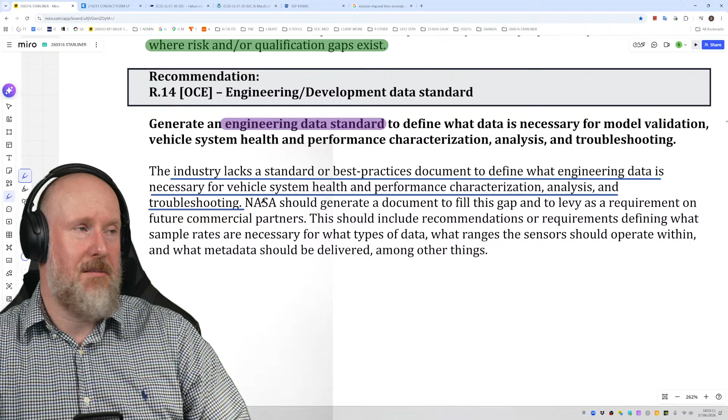Anyway, the industry lacks a standard or best practice document to define what engineering data is necessary for vehicle system health and performance characterization, analysis, and troubleshooting. I'm surprised. I'm really surprised by that. I would have thought this would be all sorted out, squared away. Okay, if it's not, fair enough. Fantastic recommendation. This is a recommendation I would make myself.

NASA should generate a document to fill this gap and to levy as a requirement on future commercial partners. Yeah, this should be mandatory. You must do it this way. The same goes for interface control document and a master data reference list. If they don't already have one of those, that also must be mandated.

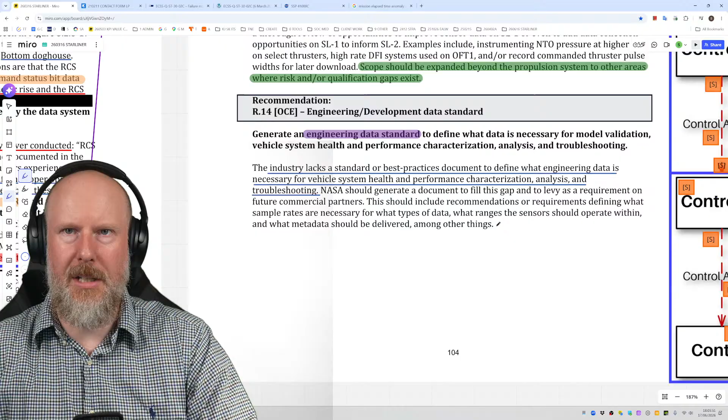NASA should generate a document to fill this gap. Yeah, fantastic. This should include recommendations or requirements defining what sample rates are necessary for what types of data, what ranges the sensors should operate within, and what metadata should be delivered, among other things. Yes, I completely agree with that. I'm a bit surprised they don't already have something like that. I would have thought that was one of the first things they'd do on day one. But anyway, let's keep going.

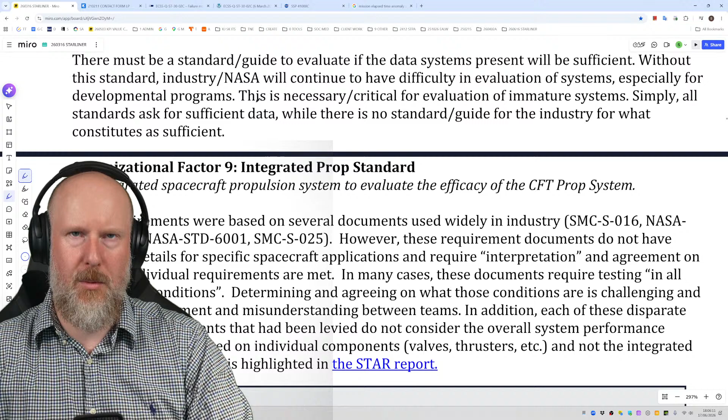So there must be a standard to evaluate if the data systems present will be sufficient. Without this standard, industry and NASA will continue to have difficulty in evaluation of systems, especially for development programs. Yes, they will. It's very expensive not to have that. That would help solve a lot of headaches and make things generally a lot better. This is critical for evaluation of immature systems. Simply, all standards ask for sufficient data, while there is no standard guide for the industry for what constitutes as sufficient.

I think I mentioned this the other day. There are some European cooperation space standards, some active standards. I don't know if there is one for this particular topic. I'm just aware these exist. If you're not familiar with them already, then I'd suggest having a look, searching for them. So I'll stick it in the chat. There we go, ECSS standards. So these are space standards. I'm not saying these are perfect or anything like that. I'm not selling these. I'm just saying there are these things you might want to have a look at if you're not already aware. You're probably already aware, so if you are, just ignore me.

Okay, right. Let's have a look. Organizational factor number 9: integrated propulsion standard. No integrated spacecraft propulsion system to evaluate the efficacy of the CFT propulsion system.

I'm just thinking about it. So this is an organizational factor. It says there isn't an integrated system to do this. So is not the factor that they did something in a way that was not integrated and standardized, and what the effects are? And so the recommendation is they do that, not that it is missing in the first place, because there may be a reason for it to be missing.

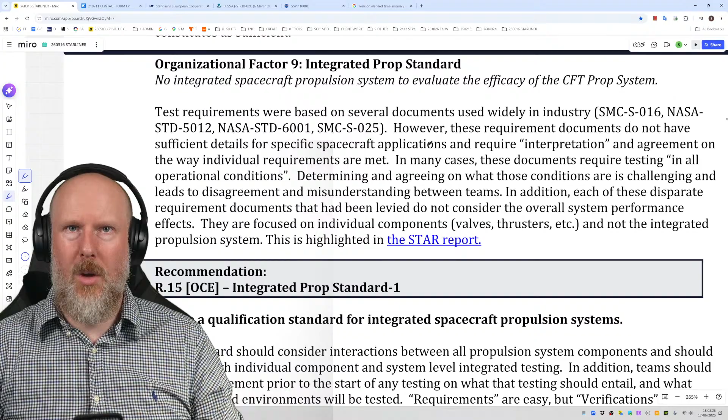To play devil's advocate, there may be a reason why they don't have that. And it may be literally they haven't been resourced or had the time to do that. Maybe they would like to have done that, but they didn't have the resource or time. So that explains why this issue exists. So recommendation 15, I better read this, haven't I?

Test requirements were based on several documents used widely in industry: SMCS 016, NASA Standard 5012, Standard 6001, SMCS 025. However, these requirement documents do not have sufficient details for spacecraft applications and require interpretation and agreement on the way individual requirements are met. Fantastic. That's what systems engineering is all about.

In many cases, these documents require testing in all operational conditions. Determining and agreeing on what those conditions are is challenging and leads to disagreement and misunderstanding between teams. In addition, each of these disparate requirement documents that have been levied do not consider the overall system performance effects. They are focused on individual components, valves, thrusters, etc., and not the integrated propulsion system. This is highlighted in the STAR report.

I wonder if the use of STPA would help to sort that out. I think that would be worth having a look at, because then you could derive system-level requirements using STPA, interactions, feedback, all that other good stuff, and then marry that with these more specific requirements that require interpretation. That's potentially quite a lot of work, depending on how big these sets of requirements are. I don't know if it's anything like submarines. There's a lot of requirements.

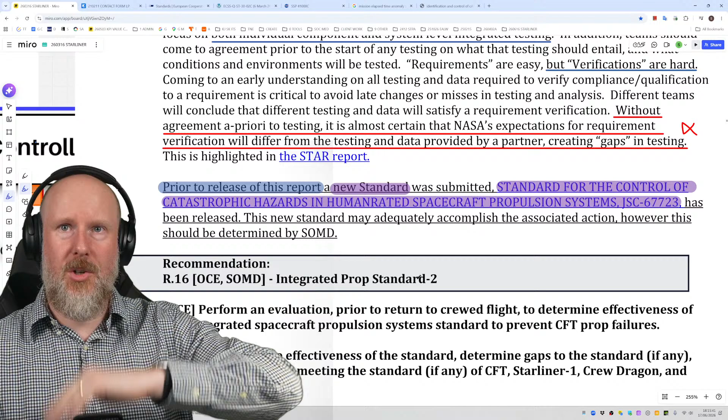So there's quite a significant knock-on effect from this report being put out into the world. And so there should be an action to do that. There should be resource available to do that. And there should be a statement that it has actually been done and maybe a response to that report to the various key stakeholders. And maybe they're doing that. I've worked in a number of organisations where they're like, great, we ain't got time to do that, sorry. And it's like, well, if you did go through it, you might learn something. It might help you save a few million or tens of millions.

But, we ain't got time for that. Let a graduate do it. Give it to a graduate. Let them read it over a weekend, and then they can give us a PowerPoint at the next team meeting, and then we're just going to ignore it. Not that I've seen that happen, of course, many times.

Anyway, let's keep going. So, fantastic. This new standard may adequately accomplish the associated action. However, this should be determined by SOMD. I can't remember what SOMD means. Oh, there it is. The Space Operations Mission Directorate. Come on, Si, you should remember that. Put that over here. Pardon me. Space Operations Mission Directorate. There we go.

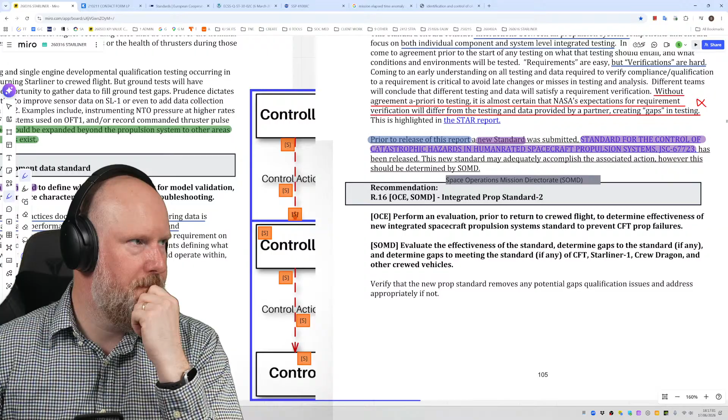Perform an evaluation prior to crewed flight. So that shall happen. So how is that mandated that they cannot go flying until this has been done? To determine the effectiveness of new integrated spacecraft propulsion system standard to prevent CFT propulsion failures. SOMD evaluate the effectiveness of the standard, determine gaps to the standard, if any, and determine gaps to meeting the standard, if any, of CFT, Starliner 1 crew, SL. Is that Starliner 1, SL1? Crew Dragon and other crewed vehicles.

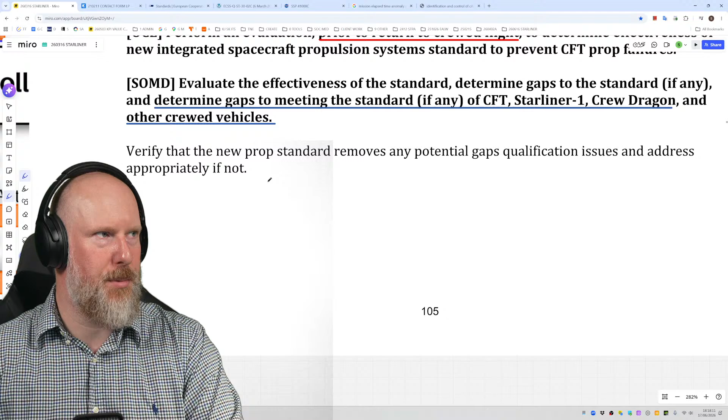I'd argue that the European Space Agency might also want to be aware of this document. So if you're watching in the Netherlands and Germany and elsewhere, I'd suggest getting that document out and having a flick through it, because I think that might be helpful. Verify that the new propulsion standard removes any potential gaps, qualification issues, and address appropriately if not. Okay.

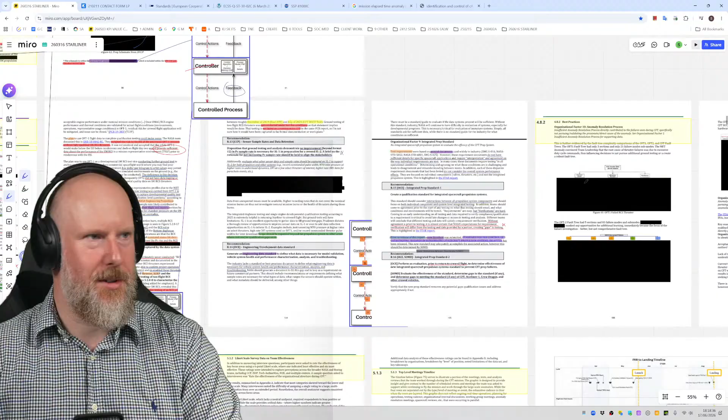Fantastic. Okay, so let's have a look at the time. It's 18:18 local, and we've got to section 4.8.2 best practices. And we've still got probably, let's have a look, 9 pages to go. I think my voice is getting ready to give out. So I think we'll call that an evening today. And we will pick up at section 4.8.2 best practices tomorrow.